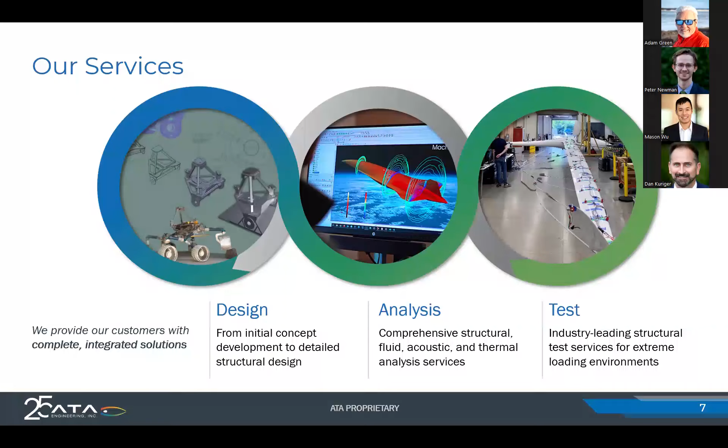When you look at the work we do on the test side, we do a lot of aerospace work for GVT and structures and analysis of things of that nature. You can see here, some years ago, a glider within ATA in San Diego was being instrumented for measuring vibration through the body and the wings.

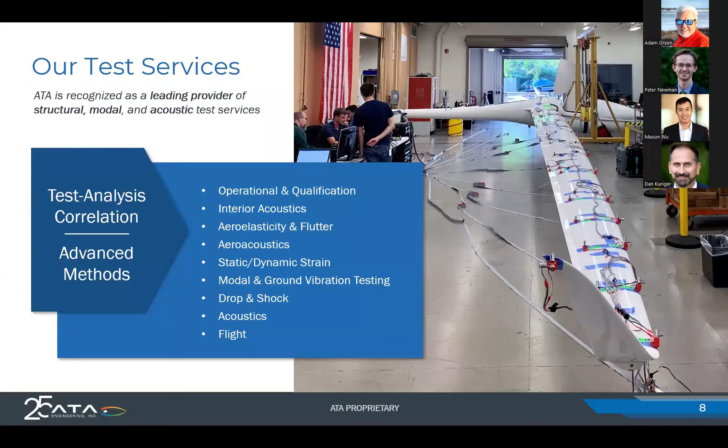On the software side, we are very much specialized in Simcenter, Teamcenter, and NX. On the Simcenter piece, today's presentation is STAR-CCM+, but Simcenter 3D, FEMAP, Nastran, all of those are used in-house extensively at ATA. We really have a lot of depth in our support of all of those products, especially STAR-CCM+, where we have over 10 users in-house now, all of which are available for help and support.

And we have a very effective system for support. Obviously a lot of it can be direct support with dedicated support engineers, but we also have a hotline for email and web-based queries for support. It all works very well.

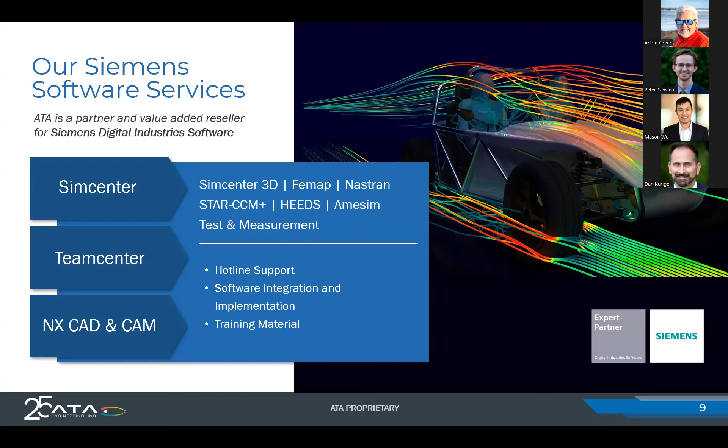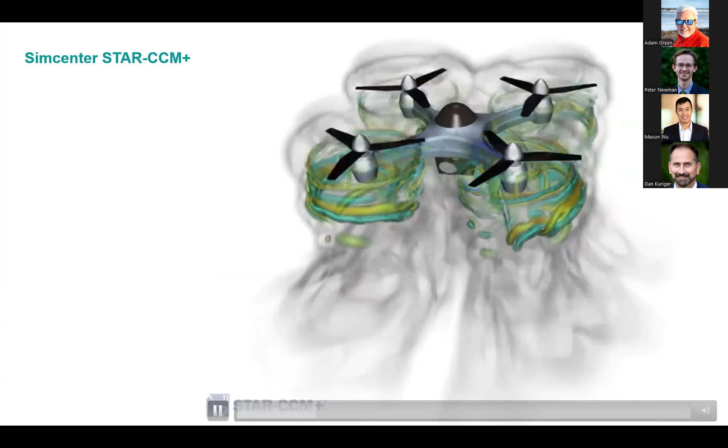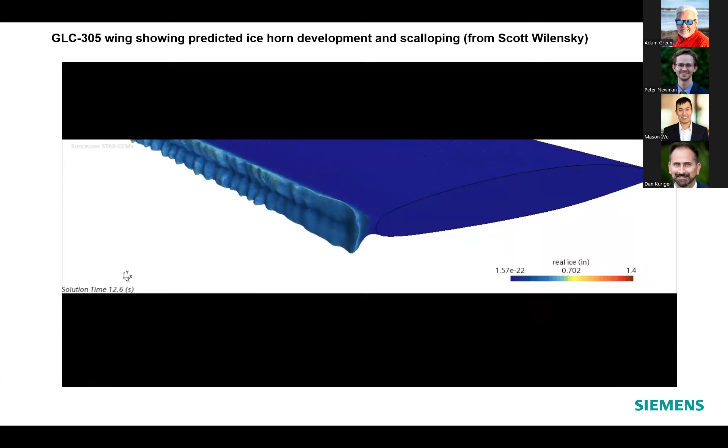So this is a nice one from Siemens, of a drone. But if we consider the subject we're talking about today, that is ice accretion on wings, Siemens have been doing this for a fair while. In 2022, Scott Wilensky, a guy in Siemens I know well, did a presentation on this subject. That's four years ago, and he used STAR as it was then, and was able to predict basically ice buildup on wings, and also the effect on the aerodynamics of that buildup. Pretty significant back then, and things have moved on since, as you'll see when Peter presents. But nonetheless, this is the kind of thing we're talking about today.

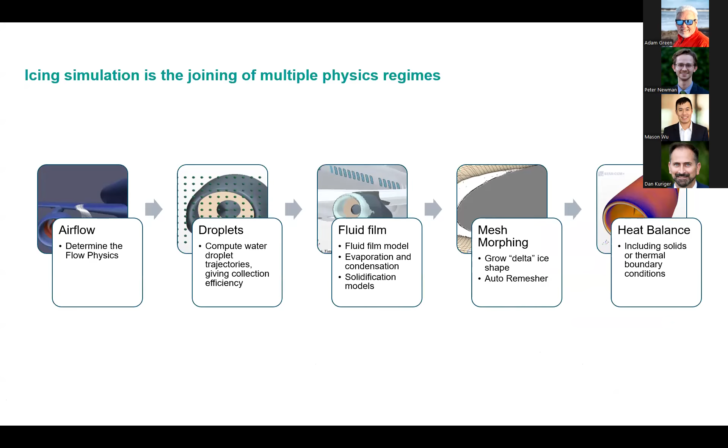And so when you look at the physics involved in that, there's a lot, right? There's airflow, there's multi-phase droplets for the air, there's fluid film on the wings, there's mesh morphing to predict the growth of the ice, and then there's heat and flow and heat balance in the whole process. So when you think about what CFD can do, this particular application really pushes it pretty hard.

This next slide is really just for a visual of, okay, when we're looking at ice buildup on wings, what do we have? We have droplets impinging on a wing. We get a thin film model, which then freezes and builds up. This really just highlights all of those physics that are going on.

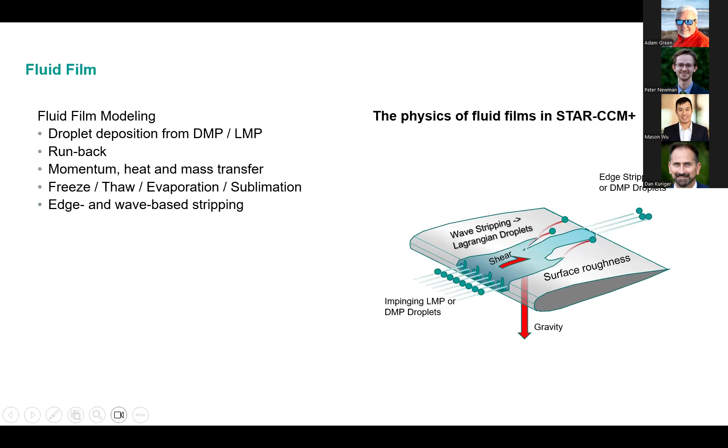And so when you apply that to CFD, you can model it, you can create the liquid film, which then becomes solid. But as it becomes solid, the shape of the airfoil changes. And what's nice about STAR is one of its abilities to morph the mesh based on the growth in that solid. So really that's one of STAR's strengths, its ability to do advanced meshing and automate it.

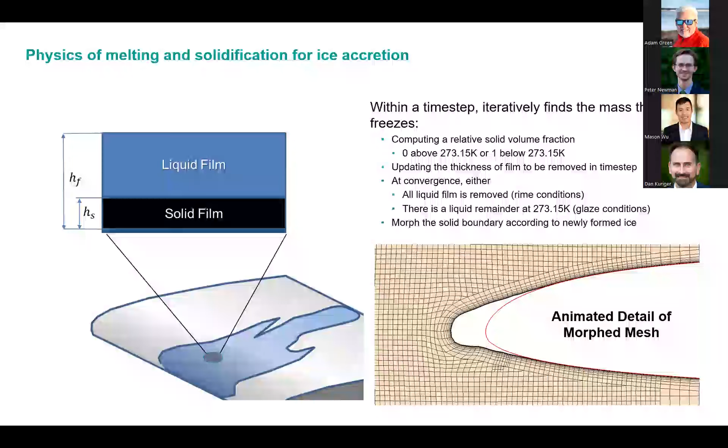And so Scott finished up his work predicting icing and scalloping on a wing, and then also compared that to a thermally controlled wing where it had some kind of heating and how it improved the situation. So that was very effective work back then.

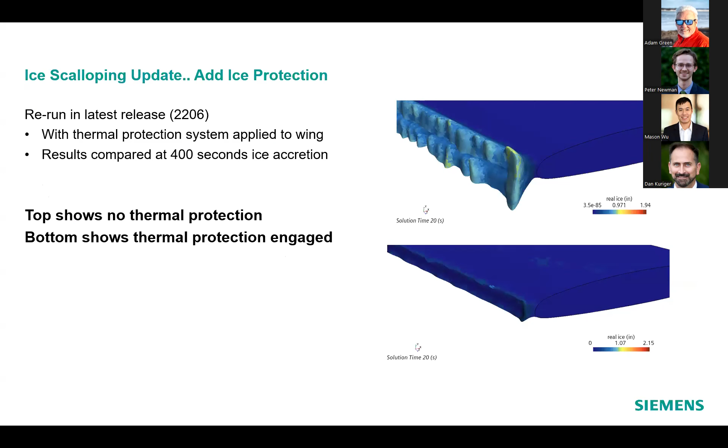The next step in the evolution of that is really, if STAR can do all of that—and Peter will show us a lot more detail in a moment what it can do—but if you link that process with HEEDS, you could actually do a lot of work in the industry during aircraft design. A lot of people don't know what HEEDS is, so a quick intro.

HEEDS is a multidisciplinary design optimization tool. So using analysis in an automated way to improve product outcomes is what HEEDS is. It's really an automation tool for using any of your existing tools in an automated pipeline so that you can get more value from them. It's a Siemens product, but it will work with almost any analysis tool. So if you've got MATLAB, if you've got ANSYS, whatever you might have, HEEDS can help you drive it and even blend tools from different vendors to create loops of automation.

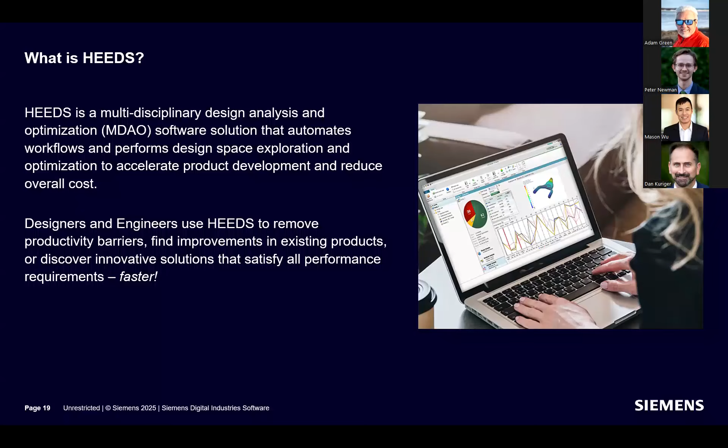This graphic shows going from CATIA to ANSA through a STAR-CCM+ loop, through some kind of internal tool that might be pulling out some numbers, through it into a spreadsheet to tabulate the answers. HEEDS can automate this so that maybe it's 100 runs of STAR-CCM+ and the combined model to get you an answer that is better than where you started. So it's really that optimization, the automation, and the data management that makes it a great tool.

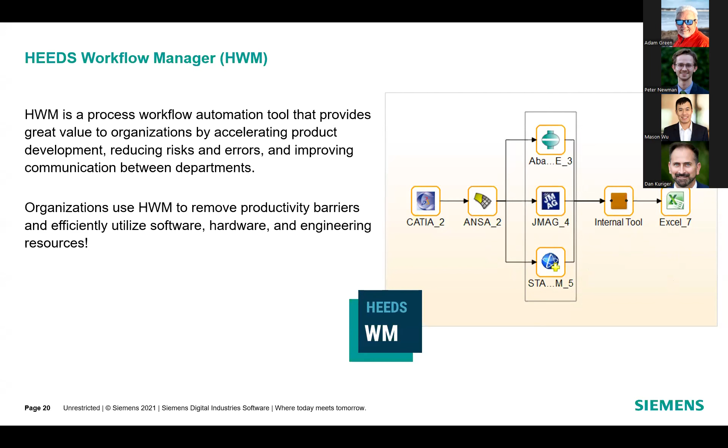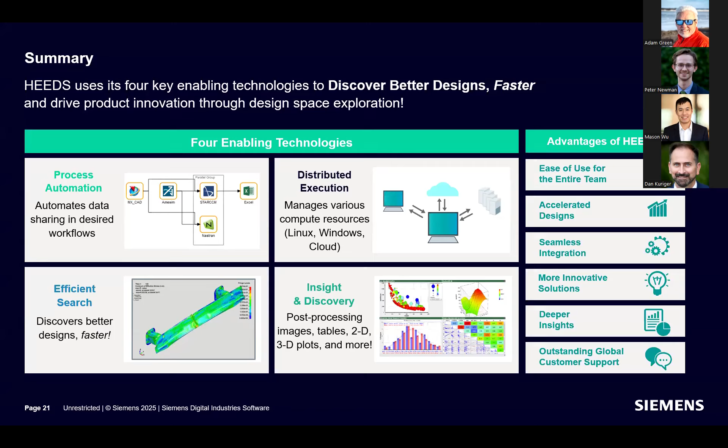This sums up the four pillars, as Siemens call them, of what it can do: process automation, efficient search, distributed execution, and post-processing—all of that really helps you make the most from automated workflows. And the reason I bring this up is because Siemens also have an example where the Honda Aircraft Company used STAR-CCM+ coupled to HEEDS to predict the performance of a thermal heating system within the wing, to design it so that it was able to reduce ice buildup and so forth.

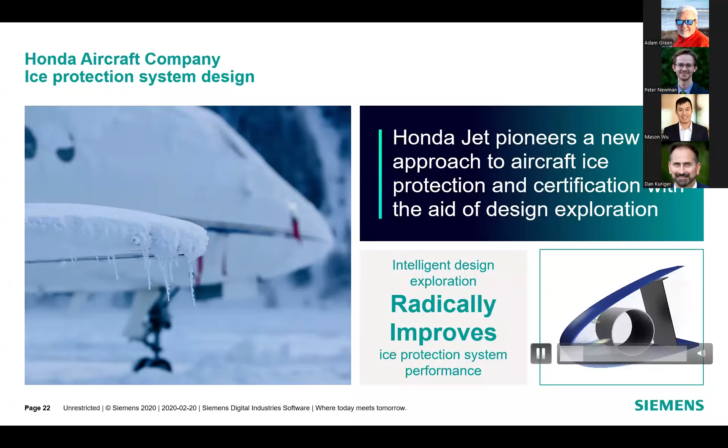I'm going to skip to the next slide now, but basically this is the internal heating conduit that was piping hot air into the wing. And really, when you look at how do we make that work...

If you've got a good STAR model for ice accretion and protection, and it's repeatable, then if you look at this model here, every one of these dots is actually a STAR-CCM+ run, and the evaluation number here is average temperature. So the warmer the temperature, the better.

And for some reason, these red ones were just not acceptable in terms of CAD or stress or something else. And remember, this would have been run automatically on some kind of HPC, probably, to really look at how...

automating STAR-CCM Plus with HEEDS can tackle this kind of problem. So it's pretty advanced. HEEDS in the last rev now has an AI predictor model where it can run, say, 100 models of your STAR-CCM Plus model and use that data to create a neural net, and then create a lot more much faster using that data to really work through the design space. But once it's come up with a better answer, it still goes back to run the full CFD model to make sure that the machine learning and the AI wasn't creating something crazy. Nonetheless, it does let you explore a design space much faster using the AI predictor.

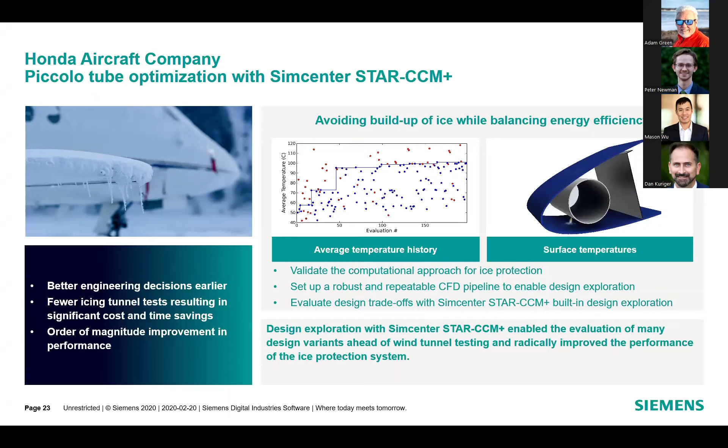So with that, I'm going to pass the ball to Peter. Tell me when you have it, Peter. Yeah, the screen share should be ready. And thanks for the intro, Adam. Oh, thank you. I'm seeing your, okay, yeah, are we screen sharing the correct presentation now? You are, yes, I'm the right screen. Perfect. There you go. Okay, awesome.

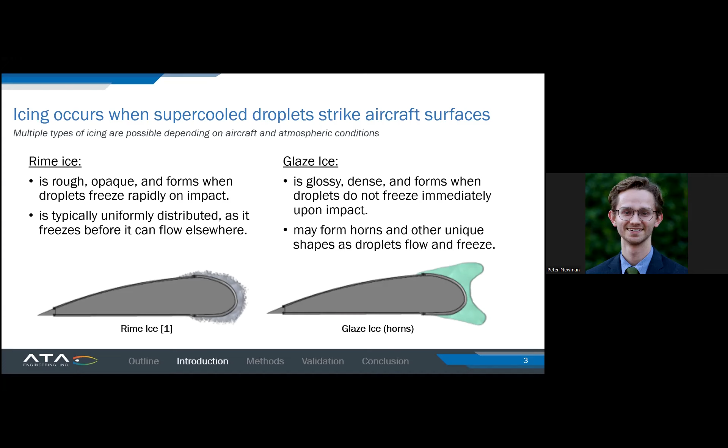In contrast, glaze icing is glossy and denser, and forms when droplets do not freeze immediately on impact. This can lead to the formation of some pretty interesting shapes and structures because the droplets have a chance to run back and freeze at other points from where they first impacted. You often see shapes like these horns depicted on the lower right.

And Adam touched on this with some other visuals, but resolving glaze ice physics requires specific modeling approaches. Specifically, it's very important to capture the external flow, droplet impingement, film flow, and phase change.

So these are a couple of representations of essentially the same thing, looking at three-dimensional and two-dimensional water film mass transport. The highlight here is that we have this aircraft surface in black, a solid ice layer in gray, and the water film here in blue. We really care about both the droplet impingement onto this fluid film, as well as any evaporation or convective transport out of the film. We also have flow in from preceding elements and flow out to elements downstream. And then we have phase change, melting and solidification, between this fluid film and ice layer.

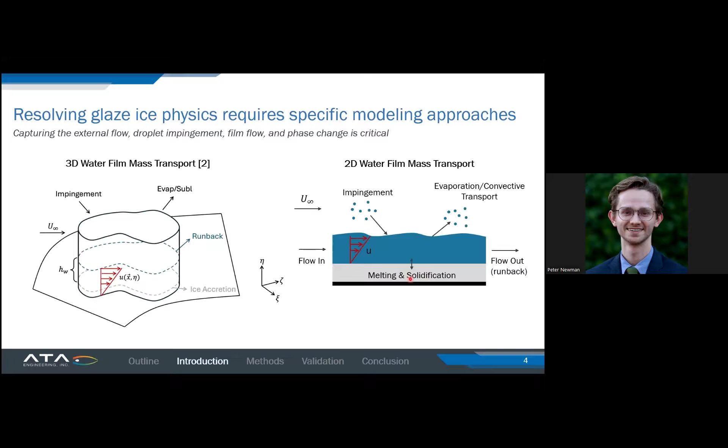So a wide spectrum of icing analysis methods exist to tackle these challenges. They have varying applications, accuracy, complexity, and computational cost. Some useful ways to categorize these icing tools are in terms of spatial and temporal fidelity. Spatial fidelity is very straightforward, just whether or not you're looking at one-dimensional, two-dimensional, or three-dimensional geometries.

Temporal fidelity refers to how often the flow field is coupled to ice growth. Single shot methods couple your steady flow field with only the clean geometry and will not couple to any ice growth. Multi-shot methods will periodically couple the steady flow field to account for ice growth as it changes the shape of your aerodynamic surfaces.

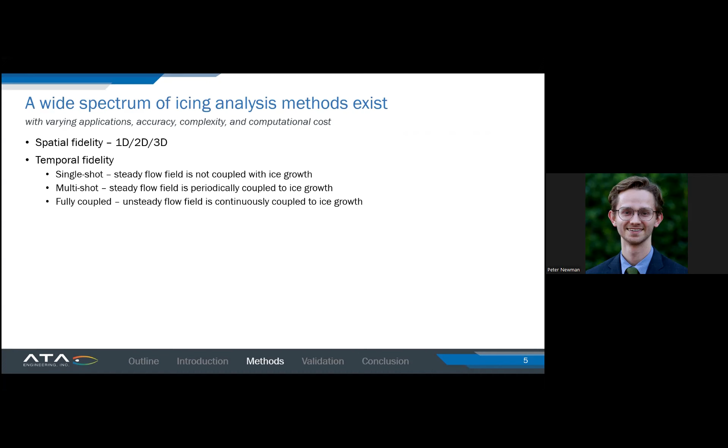And fully coupled methods continuously couple an unsteady flow field to the ice growth. This table covers a few of the different methods that we'll be looking at today, starting at the top from the lowest fidelity going down to the highest fidelity.

The first method we'll look at is a one-dimensional rime ice scaling method. It's one-dimensional, single shot, and the setup is very, very quick, but its outputs are very limited. It's just going to output a rime ice thickness at stagnation. And while limited, this is still useful for things like early conceptual design and understanding how potential ice growth might scale with geometry and atmospheric conditions.

Moving up a step, we look at LEWICE, which is a two-dimensional legacy icing code from NASA. It's a multi-shot method that typically takes on the order of seconds to minutes to solve, and it can output two-dimensional glaze ice shapes along an airfoil. This is useful for airfoil icing analysis, capturing more than just a single point or predictive ice thickness, and it's still more appropriate typically for the conceptual design stage rather than a full aircraft icing analysis.

As we go one step further, LEWICE 3D is actually a significantly different tool from LEWICE. It's more of a post-processor for CFD. The input is a CFD solution, and then it runs Monte Carlo droplet trajectories in order to predict the collection efficiency on our icing surfaces, and can calculate three-dimensional rime ice shapes as well as two-dimensional glaze ice shapes along selected profiles. This takes a bit longer to solve, typically on the order of hours to days, but it is more appropriate for full aircraft icing analysis and more complex flows than any of the prior methods.

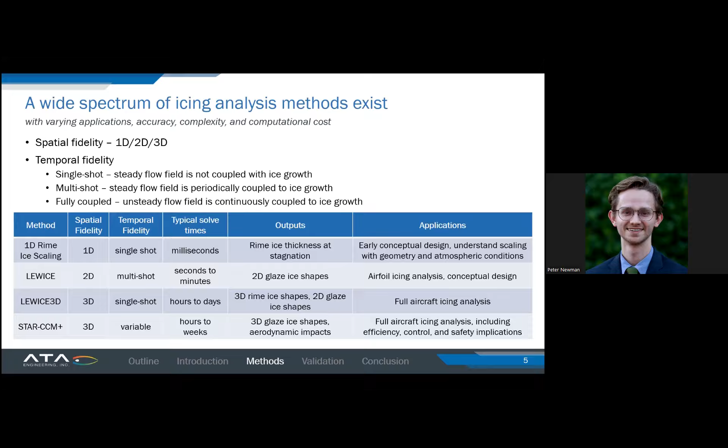So with that, I'll jump into a little bit more about how STAR specifically utilizes different physics regimes to model ice accretion. It uses this cycle depicted on the screen, where the first step is solving the external flow field. The second step is to compute droplet trajectories and impingement on the icing surfaces of interest. Third, it will calculate runback and solidification of the fluid film that develops. And lastly, it will morph the mesh to account for ice growth. This would be considered one icing iteration.

The frequency of this iteration in STAR is what determines the temporal fidelity. If we just run this iteration once for the entire icing duration of interest, that would be a single shot method. If we're running this cycle once every 30 seconds of ice growth, that's multi-shot. And then fully coupled, we'll be running this iteration at each time step of an unsteady flow solution.

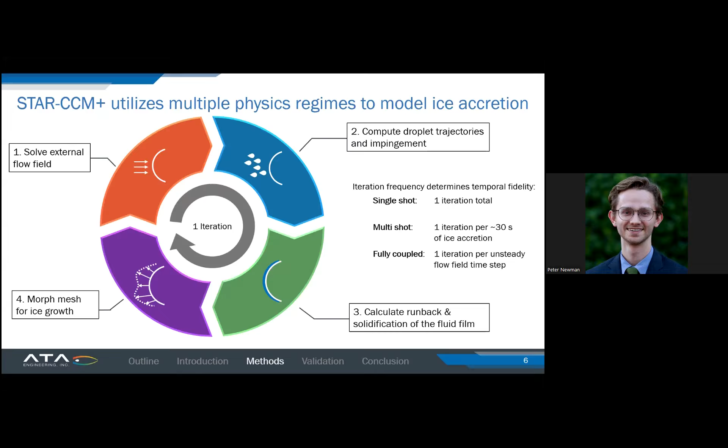Now I'll introduce the experimental test case that we are using to compare and validate the results of these different tools. This is an icing research tunnel test case that we used as a reference. The wing is depicted on the diagram on the left-hand side, and the different cuts highlighted in blue, cuts A, B, and C, are the different locations at which we will be comparing iced profiles. The test conditions are given in the table on the top right. This specific test case and these test conditions were chosen for a couple reasons.

First, the temperature and liquid water content of these experiments resulted in some pretty complex ice shapes, as shown in the pictures below. We have these complex and finely scalloped structures that develop, which is going to be a challenge for our analysis tools across all levels of fidelity. And second, it's a relatively short ice accretion time on the order of 2 minutes, which makes it much less cumbersome and/or computationally prohibitive to run the highest level of fidelity on these icing cases.

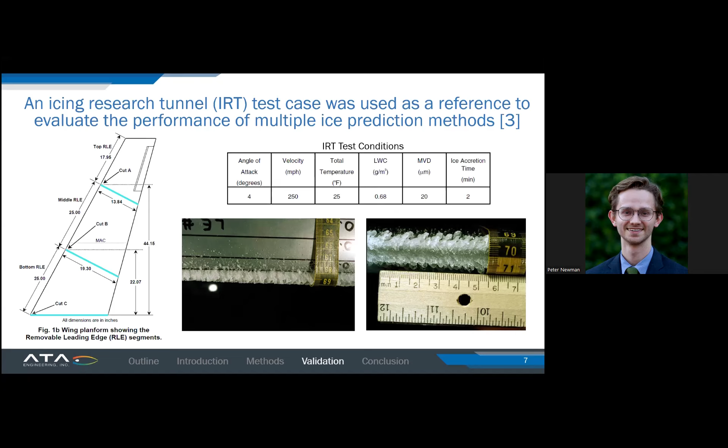I'll comment a little on the measured ice shapes and how they vary depending on location, because there's some interesting behavior here. Section A is closest to the tip of the wing, and it showcases relatively symmetric horn growth.

Section B is measured close to the midspan, and it shows asymmetric horn growth with a larger horn toward the top surface of the wing, and a larger iced extent following down the lower surface. Section C is a little different in that it doesn't display distinct horn shapes—it's a more uniform thickness across the airfoil surface, though the extent is again biased toward the lower surface.

All of these airfoils are presented in the airfoil coordinate system, where X is the axial direction of the airfoil, and V infinity on the left-hand side indicates how the free stream direction varies with respect to the geometric twist of the wing.

Section C at the root is at about 4 degrees local angle of attack, and section A closer to the tip is at almost 0 due to the twist of the wing. This is also what causes some of those symmetric growths versus asymmetric growths at different locations.

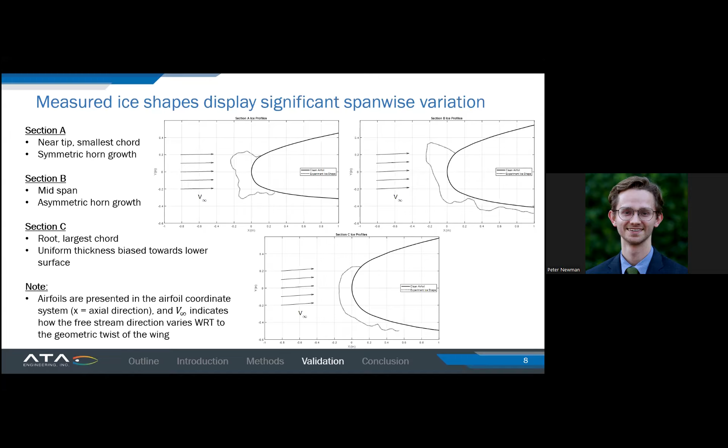Before we jump into the actual ice profiles, I'll comment on the computational timescales associated with each result. The one-dimensional rime ice scaling is a very fast and rough calculation. LEWICE takes a bit more time to set up, but is still a very quick computational process, on the order of seconds.

LEWICE3D is the first method that really requires a significant chunk of time and computational expense. This took about 9 hours of wall clock time to run on varying resources due to the different steps involved between running the steady CFD solution, exporting to inputs appropriate for LEWICE3D, and then actually running LEWICE3D. But those 9 hours consumed about 320 CPU hours.

CPU hours is simply the wall clock time multiplied by the number of processors used for an analysis, and it's a good estimate of the overall computational expense associated with an analysis or result.

From there, the STAR-CCM Plus single shot method took just under 5 hours of wall clock time on 64 processors, which yields about 300 hours of CPU time.

The STAR-CCM Plus multi-shot method took about 4 times as long, just under 20 hours of wall clock time, and just under 1,200 hours of CPU time.

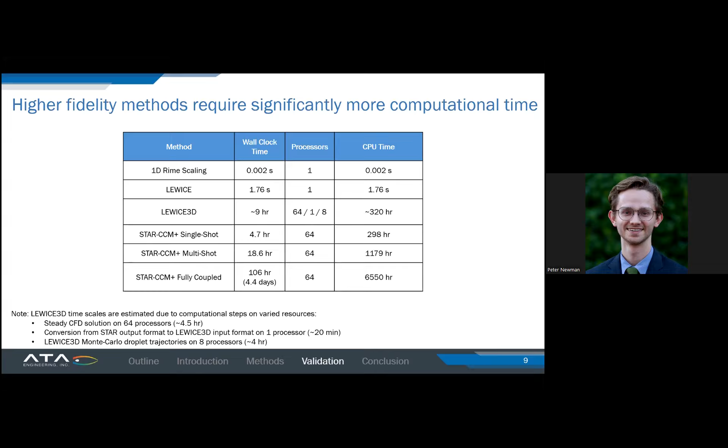For all the rime results you'll see here, we expect an overprediction that is conservative when rime analyses are used to predict glaze icing conditions. In glaze icing conditions, droplets typically run back from stagnation and away from that point, whereas with rime results, they all freeze at the point of impact. So we'd expect a higher thickness at stagnation and a more uniform distribution for all rime results, but it's still an interesting comparison.

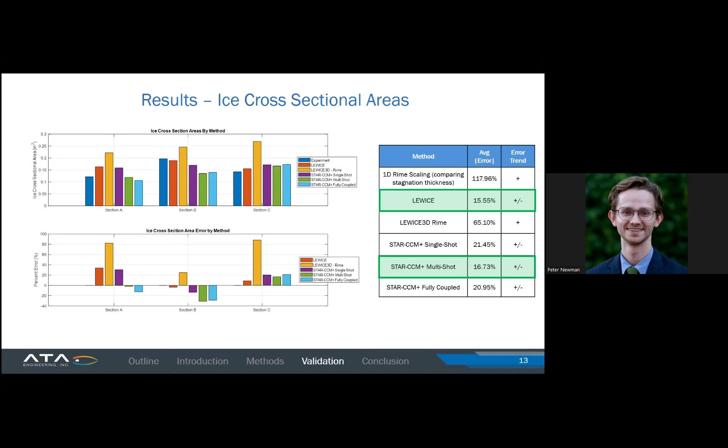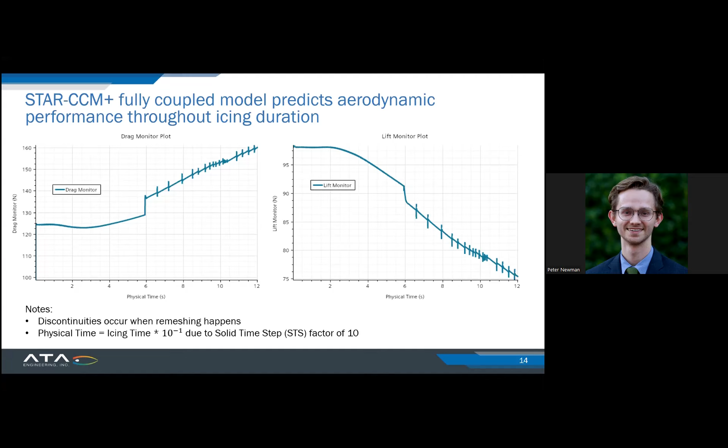I'll also note that to get good results with this method, you typically need a low Y-plus mesh that requires relatively high cell counts. This is a relatively simple model of just a standalone wing in a wind tunnel, and we start with about 17 million cells. As we remesh and accumulate ice, we get close to, or actually above, 20 million cells in the entire mesh.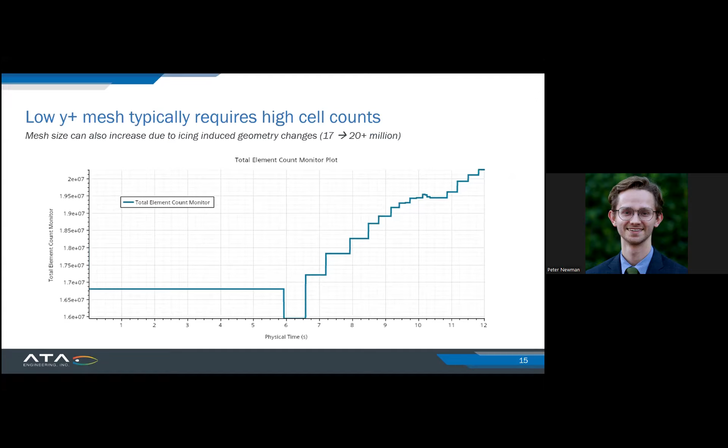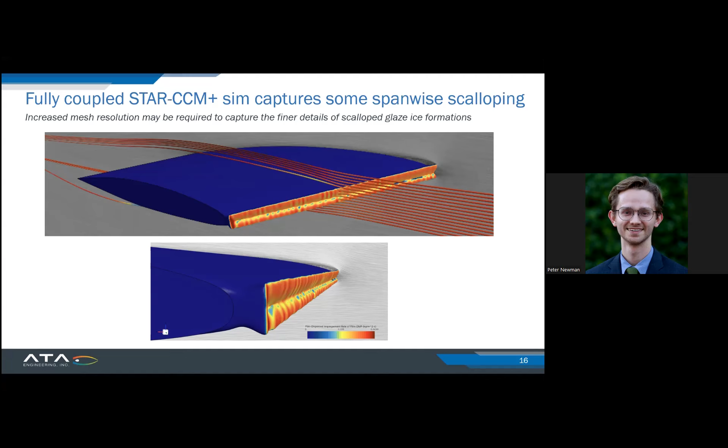So with that, we see that the high fidelity methods are generally more accurate and useful, but at the cost of increased complexity and computational expense. Our 1D rime icing method is rapid, simple, and can easily develop worst case thicknesses and evaluate how things might scale.

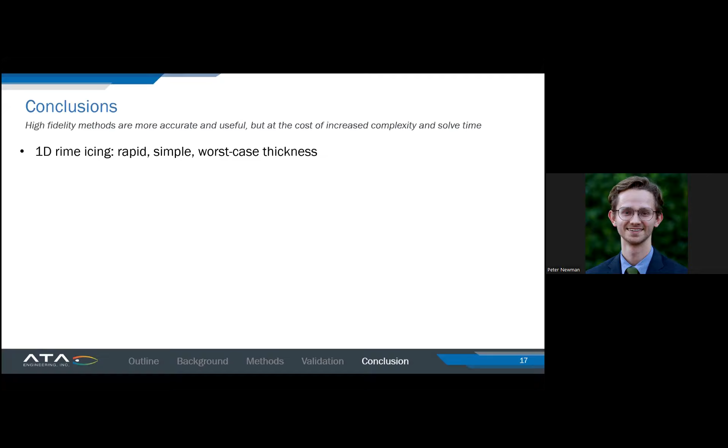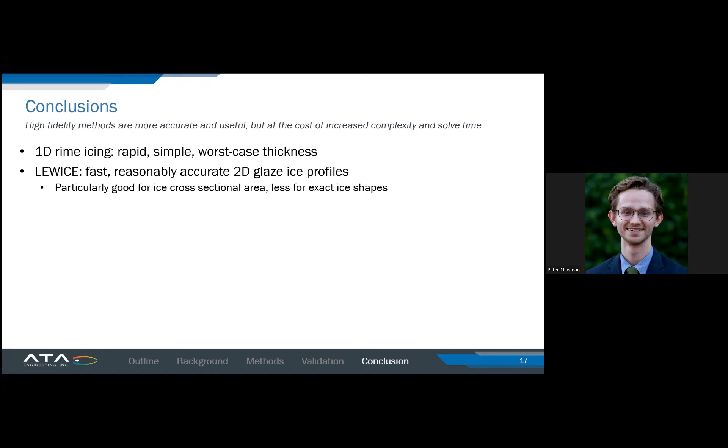LEWICE was fast and developed reasonably accurate two-dimensional glaze ice profiles, particularly good for estimating the ice cross-sectional area or ice mass, less so for the exact qualitative ice shapes.

LEWICE3D has a moderate computational cost associated with it and is good at conservative three-dimensional rime icing estimates. STAR-CCM+ single shot turned out to be reasonably accurate for three-dimensional glaze icing estimates with moderate computational cost, typically on the order of hours. Multi-shot methods were more accurate and started to capture some of the important coupling effects associated with icing, with moderate but increased computational costs, typically on the order of a day.

And the fully coupled STAR-CCM+ runs developed the most qualitatively accurate icing profiles and captured the complex coupling between the flow field, ice growth, and fluid film, but require significantly higher computational costs and can take on the order of days to weeks to run on high-performance computing resources.

So with that, I'm happy to take any questions that you might have. Thank you.

Excellent, Peter. That was great. Thank you. Well, I have a number of questions that I jotted down as we were going through that, and they really come into two areas. One is the physical testing versus the experimental. Can you go back to one of those slides?

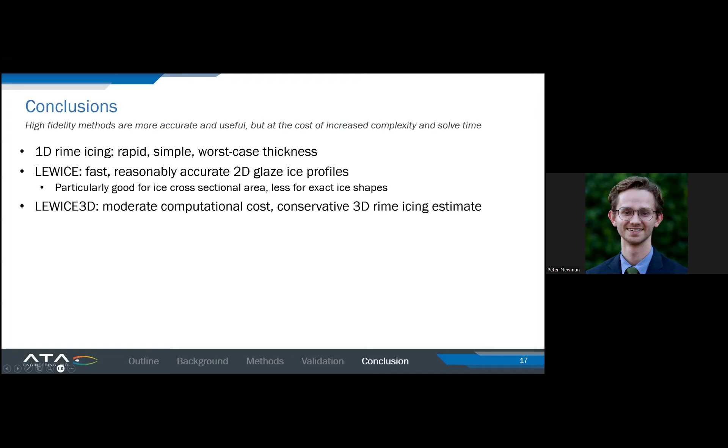Yes. So for that slide, does section C have a fuselage of any kind or not? Section C does not have a fuselage associated with it. In the actual experiment this was taken from, the wing is actually extended beyond what is considered the root. That's just a practical adjustment, because they needed to elevate the wing further to get it into the section of the tunnel where they could actually develop a uniform cloud of droplets for icing conditions.

All right, gotcha. So look at this slide again then. In fact, can you look at the next section out, section B? So you've got this scalloping, and if you take a 2D slice like you have, is it that STAR fully coupled wasn't as accurate because you could just be unlucky where you hit the section versus the scalloping? What do you think, if you took an average distance, did a 10 centimeter slice, a 3D section, and then looked at those volumes, do you think it would be any different because of the variation in the scalloping?

That's a good question. I think you would, because there is some stochastic, random nature of how these scallops develop, and we get this span-wise variation. So it would be interesting to take a section of the span and potentially average, or even just take slightly offset samples to understand what that sensitivity looks like.

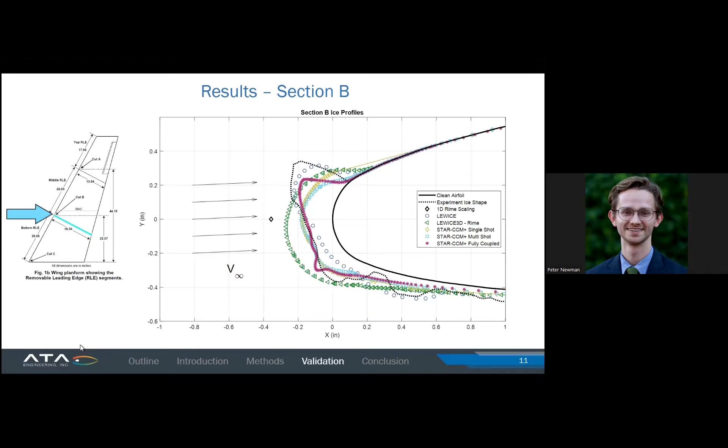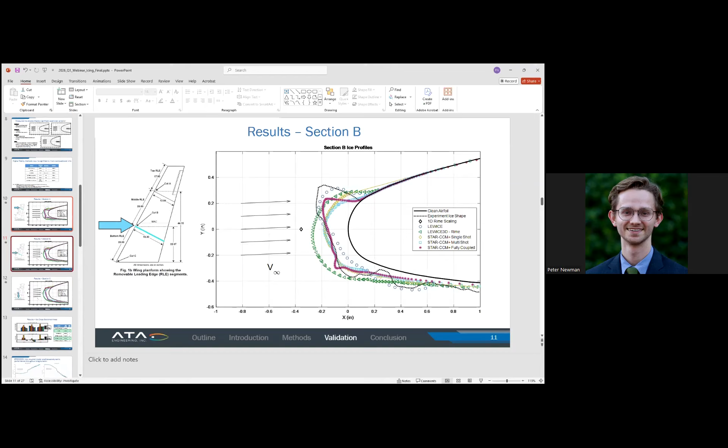And that seems like it would be a pretty reasonable approach for a variety of multi-shot icing applications, because it's designed to estimate how quickly ice might grow and how often you might need to rerun your flow field to account for the changes in the flow field due to ice accretion. I don't think I have that equation in my backup slides, but yes, there is an equation associated. If you open up the LEWICE manual and look at the auto stepping methodology, there is a guideline for that which I applied for the multi-shot method.

Excellent, all right, that's great. Thank you for all of that info, that's really good. So everyone in the audience, that's answered all my questions - I apologize if I went first, but is there anyone in the audience who'd like to ask any questions?

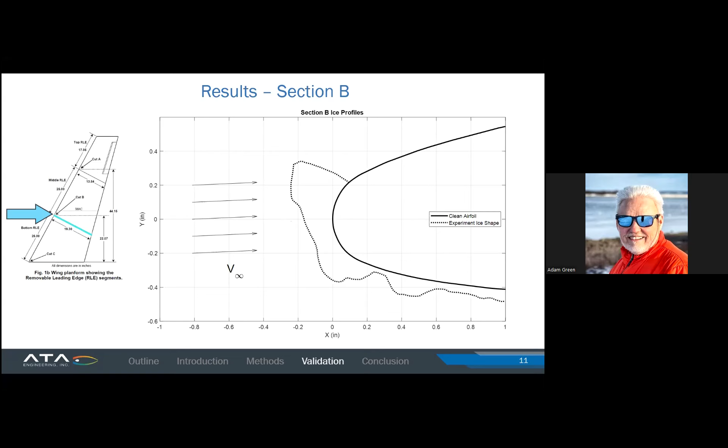Oh, thank you, Ray. Good presentation. Appreciate that. So everybody, last chance, going once.